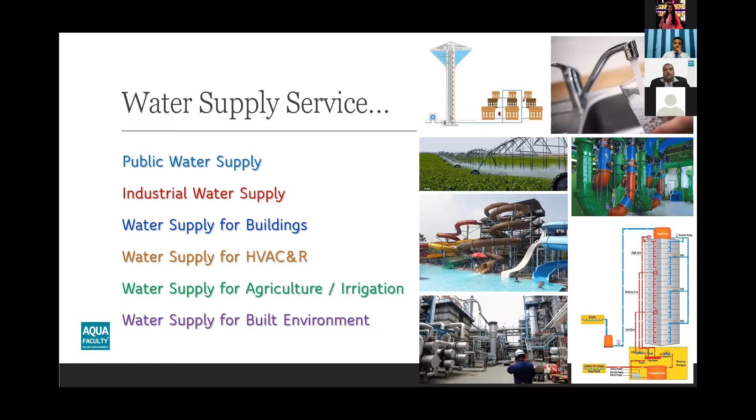Okay, here comes the big picture. So we are talking about water. If we are to deal with water, there's something we need to know and we need to follow. We all know that the amount of accessible fresh water we have on the earth is less than even 0.5% of the total we have. That is the reason why we need to use it wisely, and why we are talking about management, because everyone knows it is a finite resource.

We have the technology for converting seawater into drinking water, but it's not so easy, and the price is not so affordable when we compare with the other water sources. So that's why water management is very important.

The amount within the cycle allocated for various categories will be varied, but as a whole, it's a finite amount. This is why at the Dublin Water Summit in 1992, it was agreed to have common water management principles. It is called the Integrated Water Resource Management Principles, or Dublin Principles. We need to know about this because it's very important going forward. I would like to brief it very briefly.

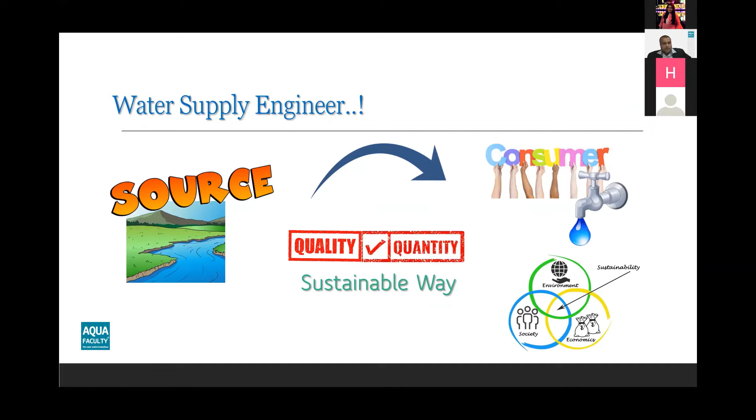Let's go to the main topic: the 5 pillars for a successful water supply engineer. Let me list them out one by one. We have identified the first one, the planning and design pillar, construction techniques, operation and maintenance pillar, management skills, and toolbox. The first 3 pillars are technical and they are interrelated.

Remember the task: we need to ensure the quality and quantity from source to tap in the process of water supply. So coming back to the first principle, all the planning as well as the design must address this requirement throughout the intended period. We call it the design period.

When it comes to construction, that means when the design elements are put into the ground, the water supply engineer has to have the proper techniques. That's the second pillar we are talking about here. In construction, you need to ensure the design requirement as well as O&M friendliness.

The third pillar, O&M, is also very important, and it plays a major role throughout the life of the water supply scheme. This is how you run the business of water supplying from production to customers, so you need to make sure of the increase of revenue while reducing the losses.

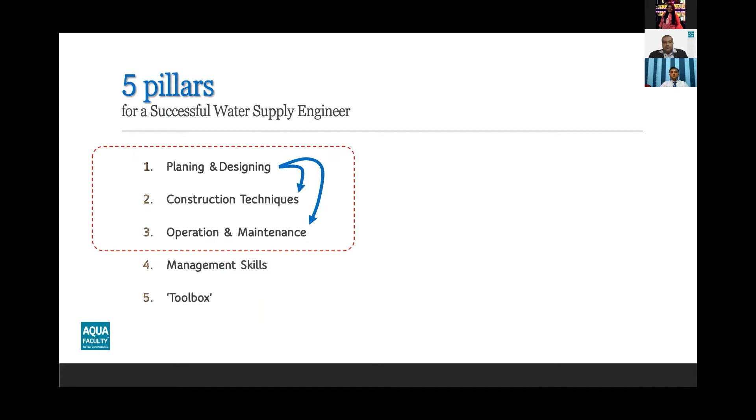This is what I call the interrelationship between the three technical pillars. We will talk about them one by one.

And I invite Dr. Gauri from this session onwards to take over and talk about planning and design. Dr. Gauri, over to you.

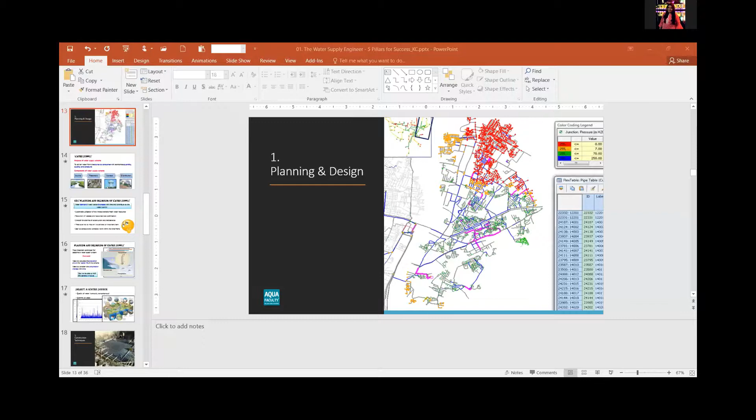Thanks, Engineer Krishan. So shall I share the screen? Yeah, sure, I will stop it. Thanks. Is it visible? Am I audible enough? Yes, yes, you are visible. Is it in full screen mode, Engineer Daraka? Yes, yes, yes, okay, thanks.

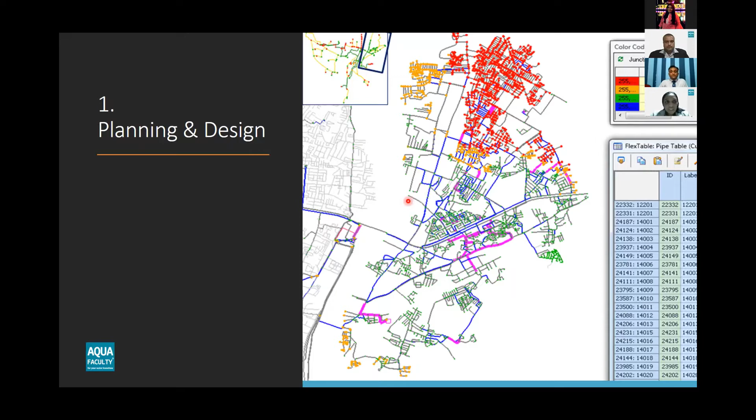Okay, so let's start with planning and designing. Before moving into that, I also want to emphasize what Engineer Krishan mentioned: the purpose of the water supply scheme is to deliver water from source to tap, or source to consumer, with appropriate quantity, quality, and pressure. We need to maintain all these things to have a good water supply.

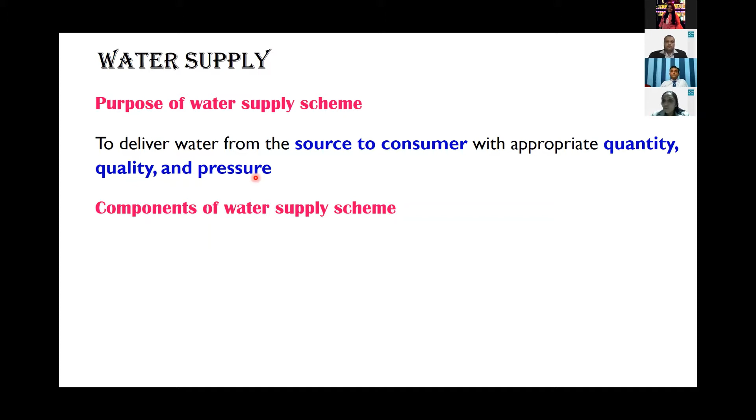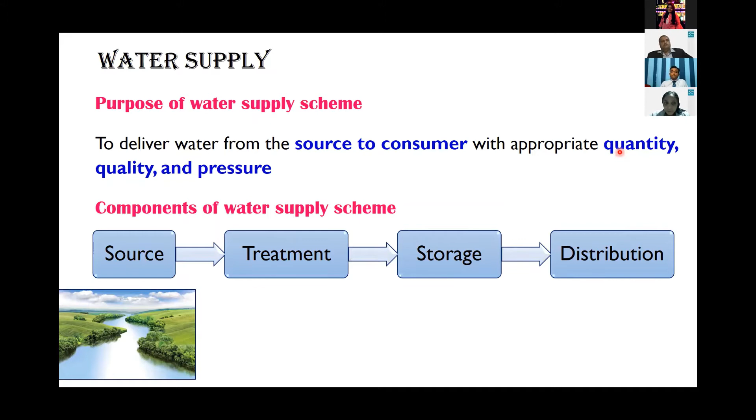In order to achieve this objective, a water supply scheme has four main components, as you already know: source, treatment, storage, and distribution. First, you need to find a source to fulfill your quantity requirement - you need to determine whether that source is capable enough to fulfill it. Then treatment is there, as you all know, since almost all surface water sources are treated.

We need to do some kind of treatment to maintain the drinking quality, so treatment is an essential component in drinking water supply. Then you can't just send the treated water directly to distribution, so you need to store it.

That storage should be capable of storing the whole amount of water we need, and also the elevation of that storage should be high enough to distribute the water through gravitational flow as much as possible, while keeping the pressure at the tap at the required value.

Finally, there's the distribution network. We need to design the distribution network in a way that losses are minimum, and it should be capable of keeping the pressure at the tap and at all other intersections and connections in an appropriate manner. Those things are kind of well-known, right?

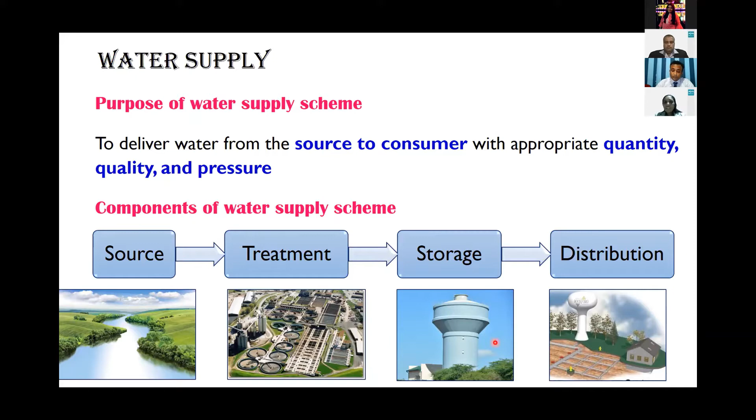So now we'll see why planning and designing is important. We all know the available freshwater resources are very limited, but our demands are increasing day by day. In order to fulfill that everlasting increase in demand, we need to manage the available limited freshwater resources. That's the purpose of planning and designing, or the management of water resources when we want to use them for our purposes.

So with that proper planning and designing, we can achieve several advantages.

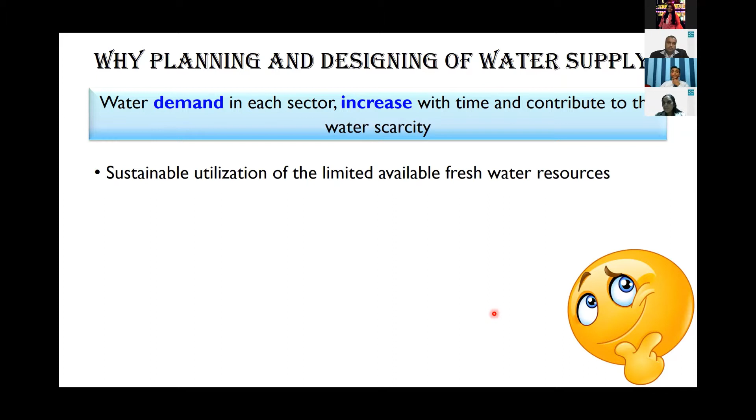So basically, we can utilize the limited available freshwater resources in a sustainable manner with proper planning and designing. Not only that, we can reduce wastages and optimize resources and cost as well.

Generally, as Engineer Krishan correctly mentioned, when we think of planning and designing, we need to consider the construction phase as well as the operation phase. With proper planning and designing, we can have smooth functioning of construction, as well as smooth functioning of operation and maintenance.

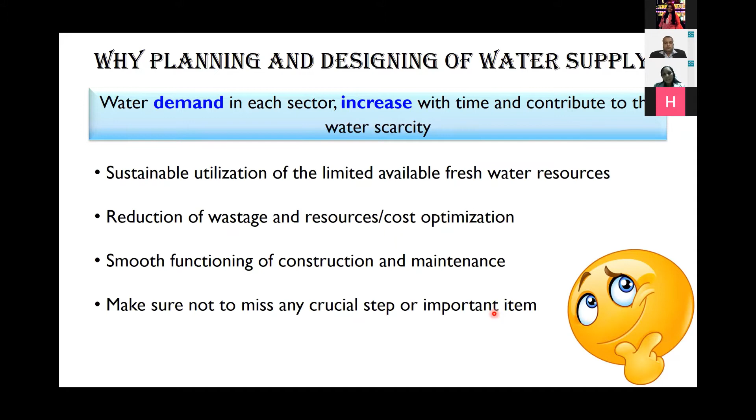We can also make sure that there are no missing items or missing crucial steps, so that we can easily schedule and make the program for our construction and also for our maintenance, so we can do our work within the given time frame.

So with planning, design and management, we can have an efficient and effective system. So these are some advantages of having proper planning and designing.

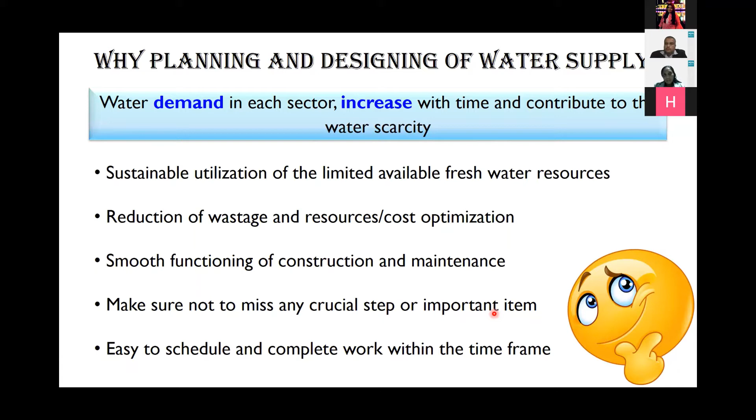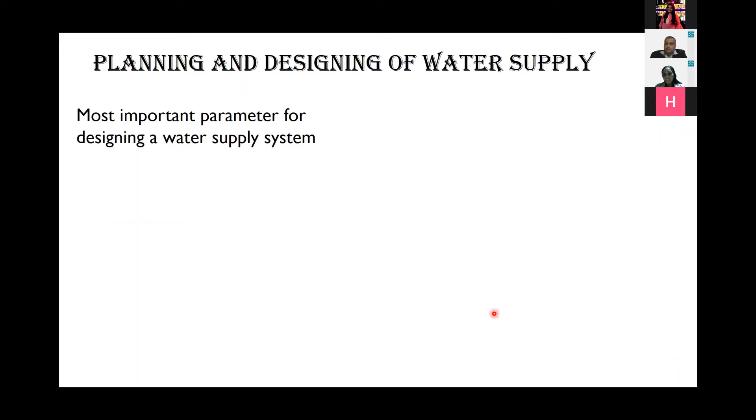Since we are considering our water supply schemes, you all know what's the most important parameter for designing, right? What's the most important parameter? We are supplying, so we need to know the demand. That's the most important parameter in our process. So how do we calculate the demand?

Generally, if we want to design a water treatment plant, we need to first define its lifetime. Design life has to be defined. Then we need to calculate the population growth.

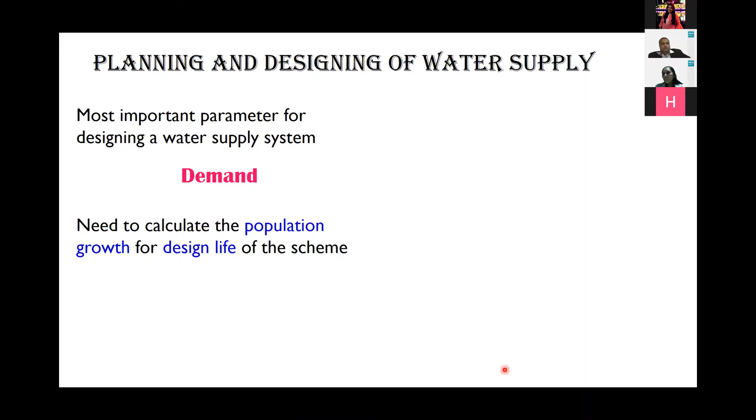You know the population growth calculation, right? Generally, almost all practicing engineers can calculate the population growth. You do the population growth calculations, right? Generally, we have to consider the previous census data, and depending on that, we can project the future population, giving some understanding about the future population and their demand.

So suppose you design your water treatment plant for a 20-year design life, then somehow you have to calculate the population growth at the end of that 20-year period. You have several equations and all that. I hope you all know those things. I'm just brushing up your knowledge about that. This is what we already considered.

But we have to consider some other facts as well. In order to calculate the demand, you need to consider the consumption changes with time. So what are those consumption changes? Does that mean we change our consumption by year? That's not the case, right?

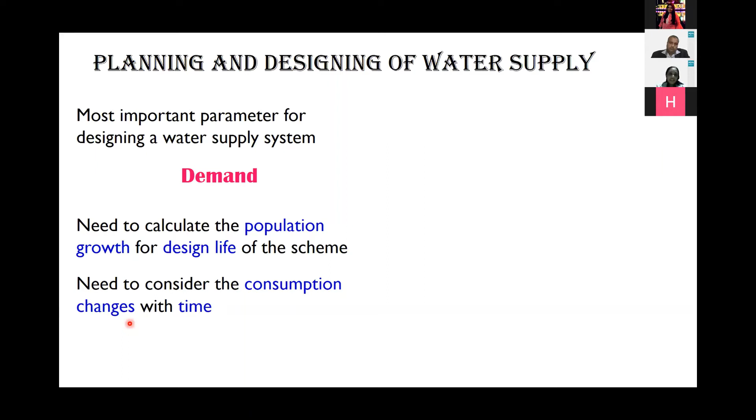The same thing happens with rural and urban communities. You know that the luxury of the urban community is higher compared to the rural community, so with that luxury life, they need to consume more water. When we calculate demands, we can't just use a single value for all communities. If it is rural, we have to use one value which is less compared to urban communities. So something like that, we have to consider those facts.

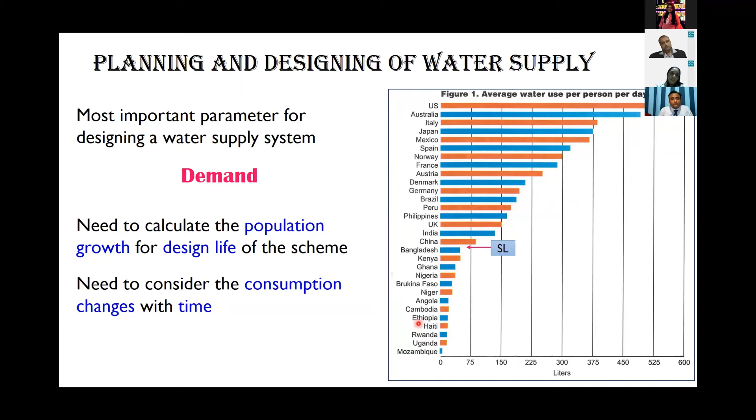Probably sometimes you may have considered those things when doing your design calculations. Not only that, we have to consider the climate change impact as well. Generally, you all know the climate is changing, and it's an emerging topic for the past decades or so. The temperature increases, precipitation changes, and sea level rises. Those things also affect the day-to-day life of people.

So that will affect water consumption again. With high temperature, water consumption becomes high. With changes of rainfall patterns, there can be drought periods and floods, and with that again the water consumption changes. So we have to account for all those facts to have better water supply management.

So if we are unable to incorporate all these things, what will happen? Simply, we may not be able to cater to the demand in future. Right? So that's as simple as that. In order to cater to the future demand, we need to incorporate all the possible changes in future.

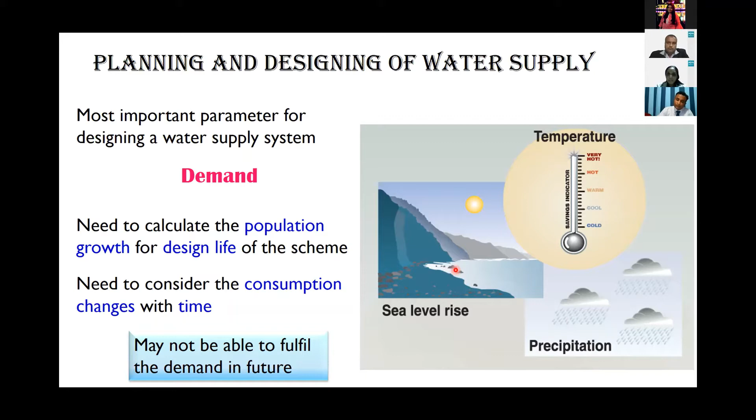So then we need to move to select a water source. Now we know how the demand calculations are done. So once you have the demand, what we can do is we can select our source.

One main important fact is check the quality of water. You have to select a water source which is non-toxic and non-poisonous. If it is poisonous or toxic, then you can't use that water source for drinking purposes. Not only that, you have to consider the impurities and sediment concentrations as well, because with high impurities and high sediment concentration, you need to go for advanced techniques of purification.

That will make a loss of public money. We use public money and we need to be responsible for that money. So we have to think of all the aspects and we have to optimize everything.

If the water source is non-toxic or non-poisonous and good enough to select as quality water, then you have to think of the quantity of water - whether that river carries the required quantity of water in the present as well as in the future.

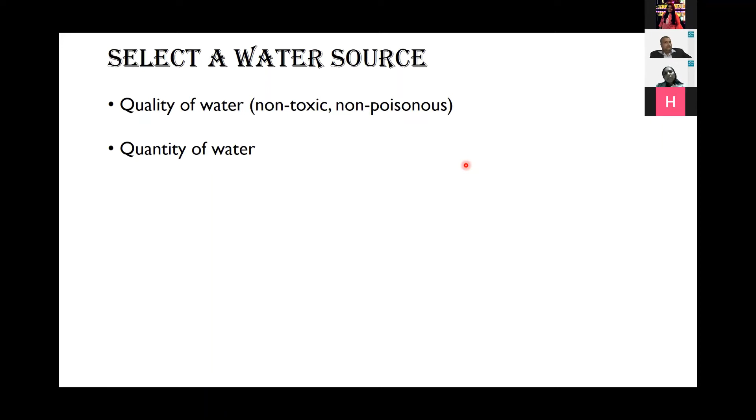So there are several techniques. Nowadays, we have several downscaling techniques. It can either be statistical or dynamic downscaling, whichever the means, you will be able to project the future rainfall. There are several general circulation models where you can download data and downscale to your region.

So by using such a method, you can have the rainfall series under climate change conditions. There are several climate change conditions. Nowadays, we are using RCPs. Under whatever the suitable climate change condition for your area, you can have a probable precipitation series in future. By using that probable precipitation series, you can run a rainfall runoff model for the future.

How can you run a rainfall runoff model for future? Can you just run a model? No, right? So first you need to calibrate and validate the model to ensure whether that model is performing well. So as the second step, you need to run the rainfall runoff model for past data.

Generally, in our meteorological department, we have rainfall data, and we can find the runoff data from almost all the rivers from the Department of Irrigation. So by using those data, we can run a hydrological model like a rainfall runoff model.

So suppose you have 30 years of data period. From that 30 years of data, you can use 20 years of data for calibration of the model and the rest of the 10 years of data for model validation. So it's something like that.

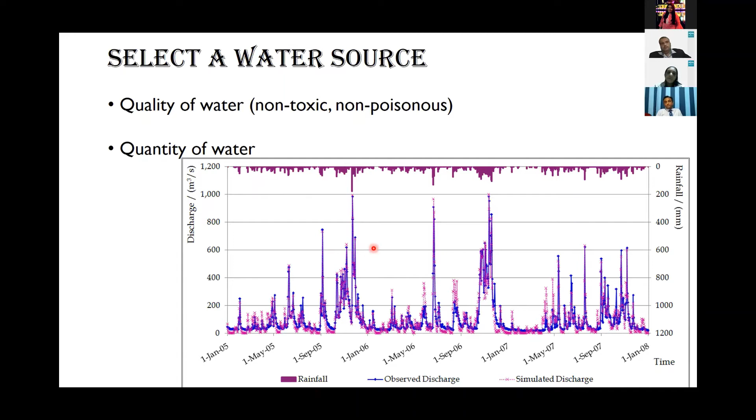So then you can apply that model to project the future flow in the stream. However, in high flow conditions, you will always succeed. But here your focus should go to the low flow conditions - whether during the low flow conditions, whether that river is capable of fulfilling our demand. We need to focus more on the low flow conditions to check whether that low flow condition is capable of fulfilling our demand in future.

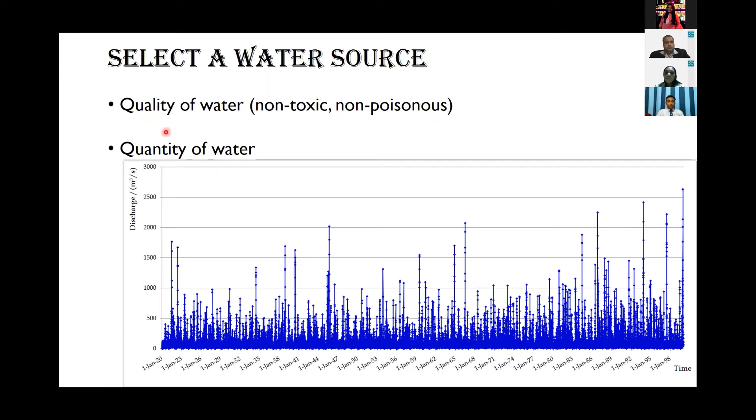So if that is satisfied, then we can consider the other factors. Basically, first we need to consider the quality and then the quantity. If those two are okay, then we have to consider the other factors needed to locate your intake location. Once you select the source, you have to select the intake location.

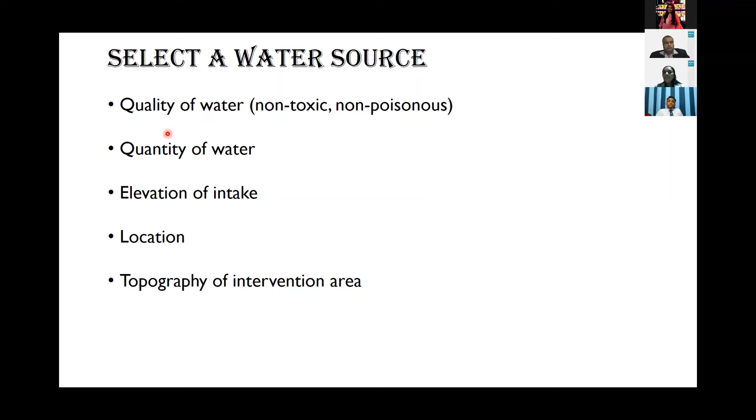In order to select the intake location, you need to consider the geographic characteristics such as elevation of the intake location, topography of the intervention area. When you consider the elevation of the intake, it should be kind of much upstream compared to the intervention area.

Otherwise, you may have to spend a lot of money to take the head high and lift the water; pumping cost will be high. At the same time, your intake location should be... not only that, you need to consider your river bathymetry as well.

During the dry period, sometimes the left bank of the river is dry, whereas the right bank carries the water. So in that case, don't go for the left bank construction. You need to go for the right bank construction. Otherwise, you need to spend another large amount of money to take water from the right bank side to the left bank side, right? Yes, you need to consider all those practical conditions, right?

So your intake should be in a higher location, higher elevation or upstream elevation, and the location should be close enough to the intervention area, and also it should be on the side of the river where the flow carries in the dry season. And also you need to consider the topography of the intervention area, because if you lay your pipelines along a steep slope, then your losses will be high, and also the velocity is high and cavitation can be there. So you need to face a lot of problems.

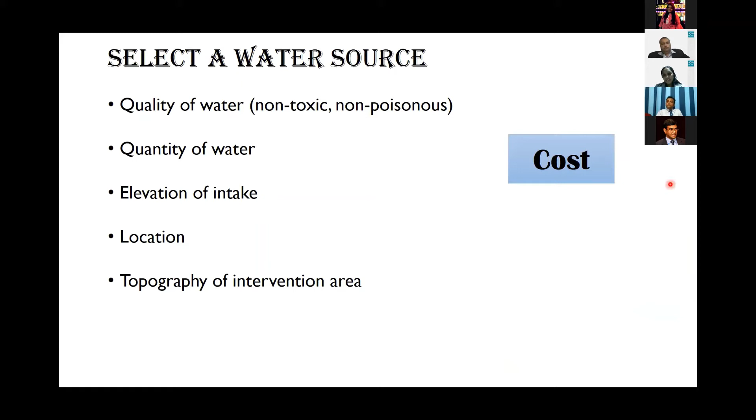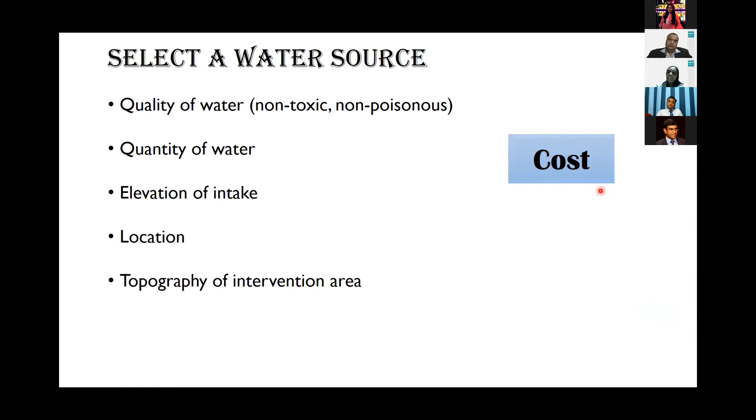So as you all know, finally, everything comes as cost. Somehow we have to optimize the cost. We have to minimize the cost. Minimizing does not mean using low quality materials and ending up with some output, right? You need to optimize everything to minimize the cost. That is why engineers are there. You can do that, right? You are the practicing engineers, so you can do the miracles.

And when you go to a new water supply project, you can't apply the same techniques, the same arrangements to the new project as you applied in the previous project, because that is a new project. The topography is different, the water requirement is different, and all the other intakes are different. So you need to think freshly for your new construction, right? New design. So you can apply your basic knowledge of science and theories to practice, and you can create something different. Okay.

So designing and management as well as planning is very important in the initial stage, and you have to think for the lifespan of your project.

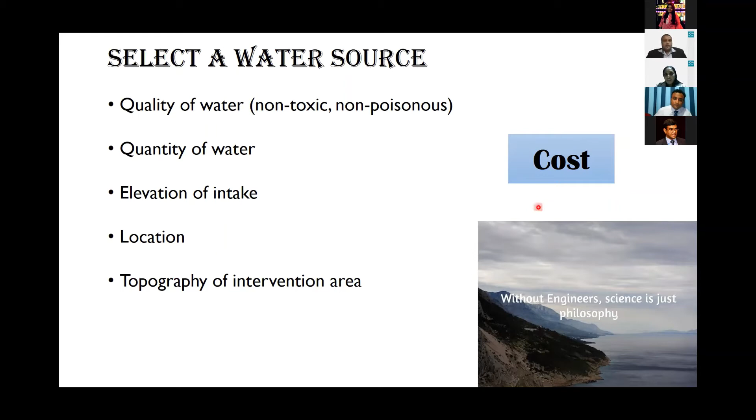Yes, thank you. Again, I hope you have a good idea about the P&D pillar we were talking about. And I hope we had some kind of new way of planning. I mean, not a new way, a new dimension, I would say. The things we need to consider in terms of future consequences, hydrological modeling and these kinds of aspects. This is something new, and something we need to consider when we are planning and designing new schemes.

Okay, with this, I will go to the second pillar of what we are talking about here, and the second pillar is construction techniques.

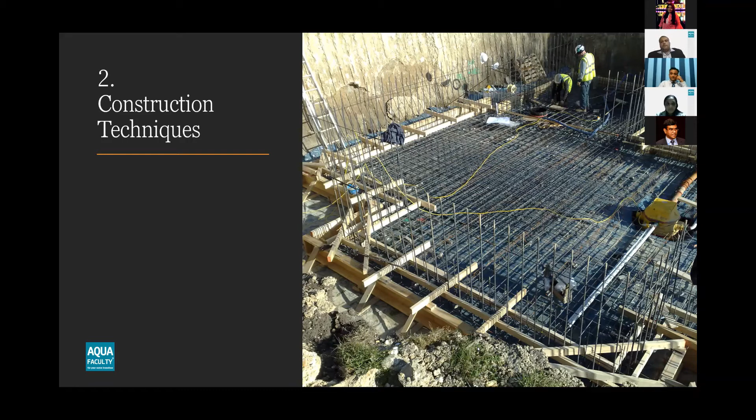Construction techniques. In the field of water supply services, both in the initial stage as well as during O&M, different kinds of construction activities can be there. So here we have listed a couple of activities related to construction during the design, during the construction period, as well as during O&M. It can be civil works, mechanical installations, cable laying, power supply requirements, steel erections.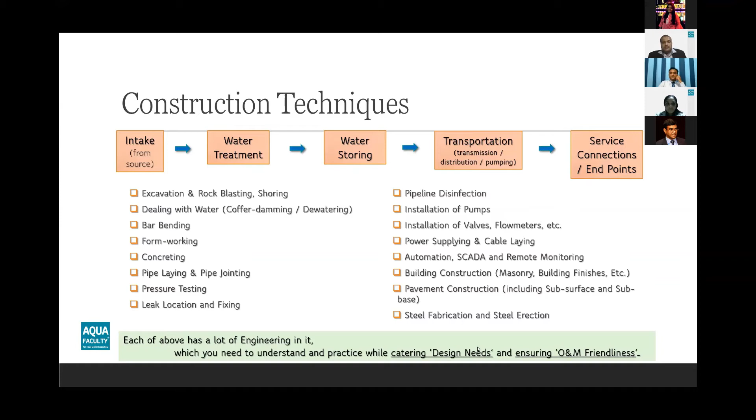Okay, let me explain the difference between technology and techniques. Here, technique is the way or the style of doing things. On the other hand, technology is the use of scientific principles for achieving certain objectives, or the application of scientific principles behind the working of gadgets. So you need to have the knowledge of technology and its principles, which we will talk about under the fifth pillar. That is very important.

You need to have updated knowledge of the technology anyway. But techniques are developed based on the technological requirements. Different people use different techniques for using the same thing or gadget, but the function of the technology remains the same. Knowing the techniques is very important, especially in construction works. Here, construction means not only civil construction, but all the other installations as well. Let me explain with some illustrations, some examples.

For example, in pipe laying works, depending on the terrain, depending on the profile of the intended pipeline trace, we need to cut pipelines. When cutting DI pipes, especially large diameters, you need to take some care, because not all pipes are designed to be cut as you want. Large diameter pipes have the tendency of deforming the rounded shape we want in the pipe. It can be deformed because of the self weight, and also because of how we handle it.

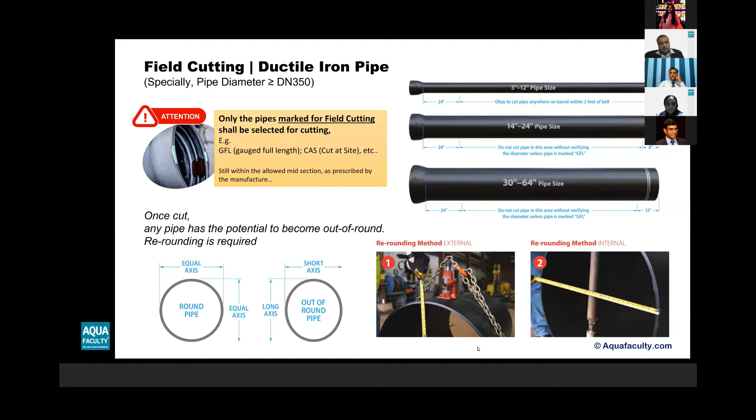This is also very common in pipe laying. Nowadays we are using a lot of PE pipelines, and we use butt joints.

In the butt joints, when the joint is done, you can have an idea about the joint from a visual inspection of the bead shape. When you make the butt joint, you can see this bead externally. Beads are there both externally and internally, but the internal bead we cannot see. The external bead we can see, and the shape of the bead will indicate how good you have made

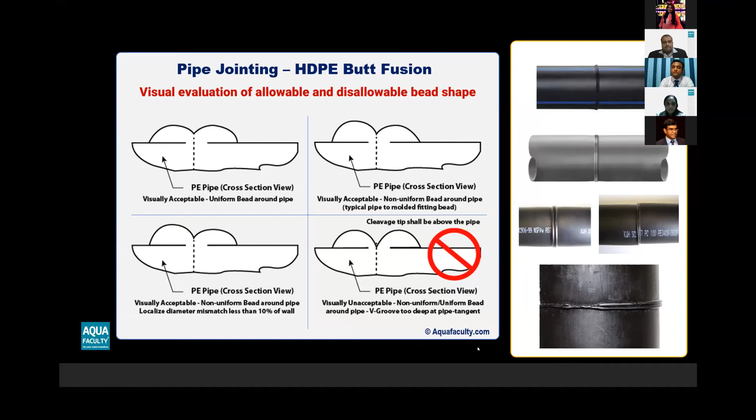Okay, now the third pillar. It's about operation and maintenance. That is a very important pillar in the water supply scheme. So what do we have under O&M? Operations. Basically, in the water supply service, the objective is supplying water in the required quantity and quality to the end users. Depending on your field, the end user may change, because as I explained at the beginning, the water supply can be public or industrial or irrigation, but we need to provide the required quantity with the required quality.

So when it is for the public water supply, the regular water consumption we are talking about here, it is a bit challenging, because most of these assets, the pipeline networks, come under third party properties like roads. So we need to take care of these kinds of assets during the operations. Coming to the operations: the production and distribution, supplying and sales.

I like to stress the sales part also, because if the production is there, there are sales also. So we need to consider the revenue. Revenue is there to run the business of water supply. You need to have some revenue for that also. On the other hand, regarding the maintenance, it's a very important part.

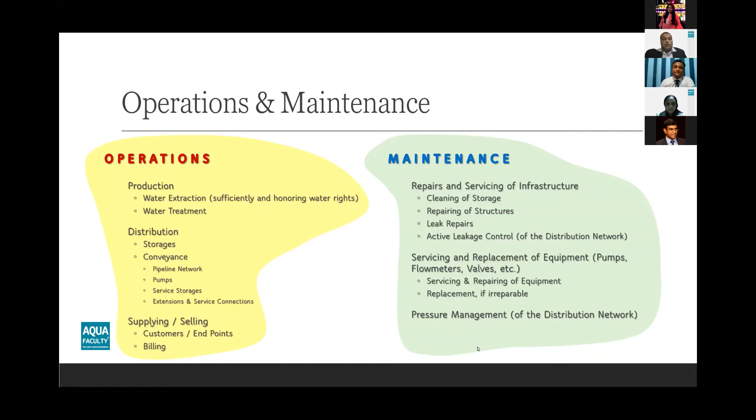On the other hand, you need to know where your water goes. This is very important. When you produce your water, you need to know how this water ends up in your network. The aim is that the water should go to the customers.

Okay, we have made leakages. So we need to have an understanding of how the amount of water is being distributed among these different kinds of, I would say, users. That is why we need a kind of water audit.

It is the same as having your salary: you need to know how you are going to spend the salary within the month. Or if you have a company, you need to know how you spend your income throughout the year. It's a kind of auditing. So this is a kind of technical auditing.

Ultimately, you know how the water coming into your network is distributed among the users, as well as the part of leakages. What is the contribution? What is the amount of losses? What kind of losses? That is why we have tools like the IWA water balance.

So your network has to be developed to monitor these kinds of losses and these kinds of audits. If you have sufficient equipment and tools to understand how your water is consumed within the network, then you know the amount of revenue, the amount of non-revenue water, and even inside the non-revenue water, what part is lost as physical losses and what part goes to apparent losses.

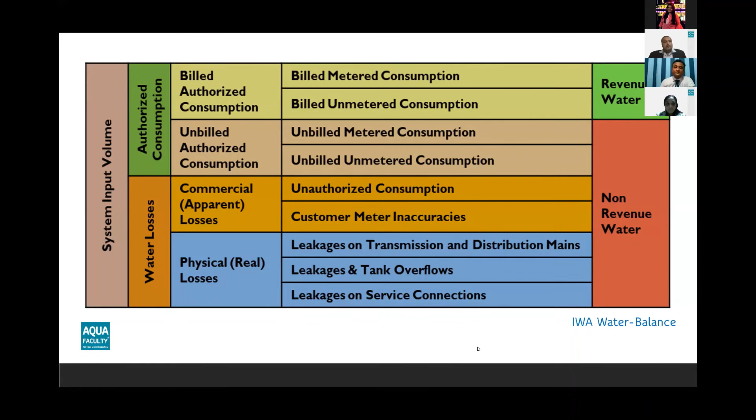On the other hand, talking about the reduction of real losses, we also need to understand that. This is also an IWA approach to reducing real losses, the physical losses. First, you need to do speedy repairs. When you observe a leak, the first thing you need to do is quickly repair it.

Then the next step is, without waiting for leaks to be observed, you need to hunt for the leakages. This is why we have to have active leakage control, ALC. ALC means you're not waiting until the leaks are reported; you are hunting for the leaks. That's why you need a program for leak location.

First, leak detection. It is simply from flow meter night flow analysis, and after that you need to find the leakages. They can be small at the beginning, but don't let them get bigger over time. If you can find the location and do the repair at the very beginning, it will save a lot of water.

And third, if you have implemented both action 1, the short-term speedy and quality repairs, and action 2, active leakage control, then you can think whether there is anything more to do to reduce leakages. It can be pressure regulation, pressure management, probably at night time using a pressure reducing valve. You can introduce these pressure modifications to the network while still catering to the demand even at night.

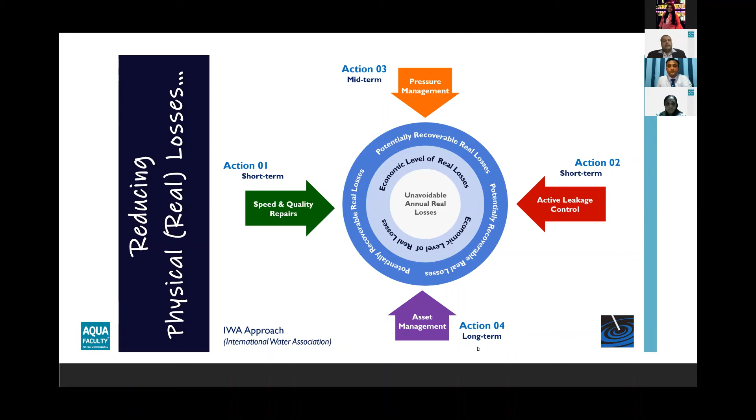It can be construction, it can be P&D, it can be O&M. At different stages, you need to have this kind of practical things, and you need to excel in this kind of techniques in order to do certain creative and different things, and you need to upgrade the level of service. Okay, it's the same approach for the apparent losses, but for the moment, since we are running out of time, I will go to the next slide, the next pillar, the management skills.

Okay, now we have three pillars which we call technical pillars, which are interrelated: the P&D, the construction techniques, and the O&M. So now you have all these technical pillars, okay, but is that enough? No, you need to have some management skills, because if you have only the technical skills, it will not help. You need to be successful in your water supply service.

For example, now you have targets given in your job. You have to work with people. It can be customers, peers, subordinates, your bosses, and the service providers, stakeholders, and you need to work with the material you have. You have some budget restrictions. Definitely everywhere you have this, and you have some time frame. Even with all these things, you need to produce a quality output.

Okay, apart from your job, you have your friends and families, your personal objectives, your career development. So being engineers, you need to manage all these things. That is a part of life anyway. You can't say, okay, because of this I cannot marry, or I need to look after my parents, so I cannot do my job. You can't tell that. If you want to be successful, you need to manage these things, because everyone has these kind of problems. It's not only for you.